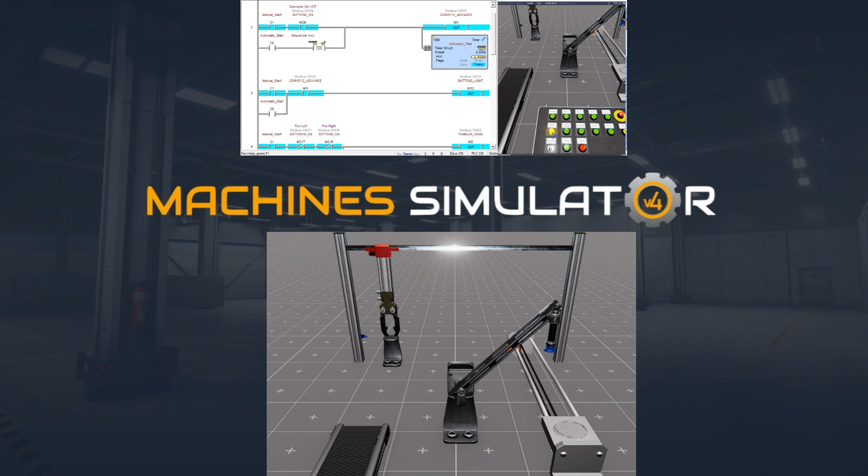The Machine Simulator suite comprises several machines that can be programmed, or you can design your own. One such machine is Benchwork 1, which transfers red pills from the collection area to the exit belt conveyor. Using the Do-More Designer PLC software, we can practice programming by connecting the Do-More Designer PLC simulator to the Machine Simulator Bench 1 machine. Communication will be done using Modbus TCP Ethernet.

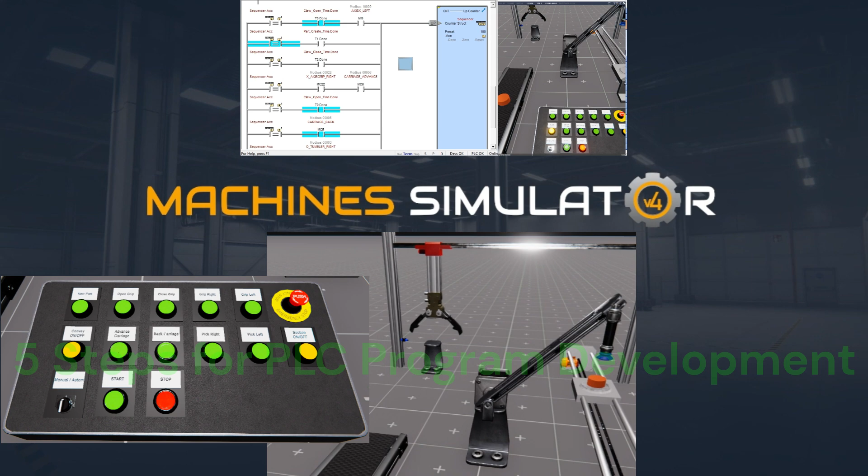The Benchwork 1 machine incorporates a manual and automatic mode to operate. Automatic will incorporate a sequencer using a counter in the PLC program. This is the easiest way to program sequencers. The 5 steps for developing PLC programs will be used to program this machine.

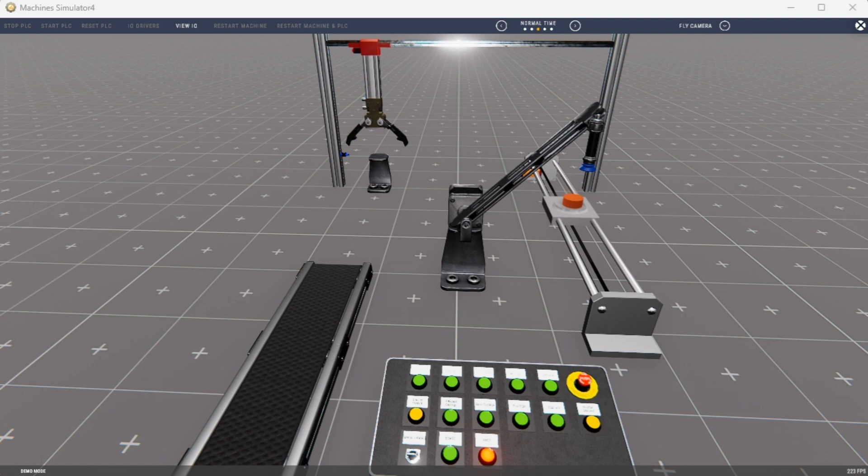While still in demo mode, select View I/O to display the inputs and outputs required for this machine. This PLC programming example will require 15 digital outputs and 23 digital inputs. These PLC I/O are for the machine's physical running and do not include additional registers or bits required for programming.

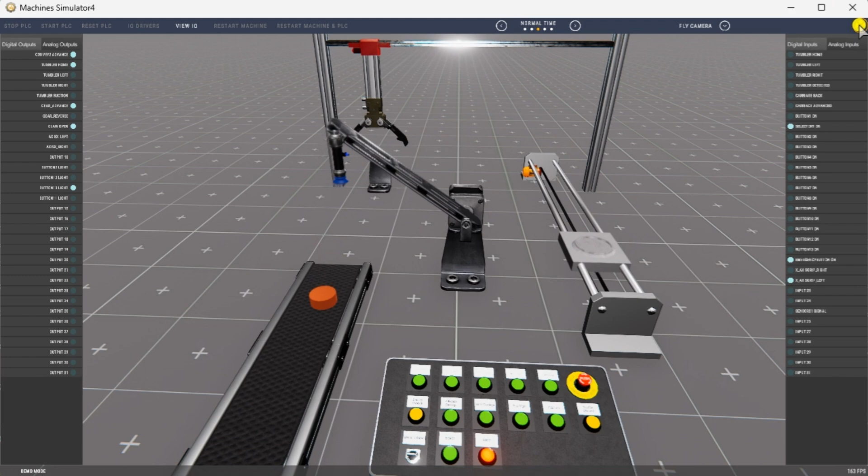In the case of the Benchwork 1 PLC, the inputs include the status of the push buttons on the control console for all the manual operations. These inputs will determine the machine's control. The outputs include signals to move and create the red pills. If you are unsure what an output or input is doing, start the Benchwork 1 machine in demo mode. Select View I/O at the bottom of the Benchwork 1 Machine Simulator window.

You can manually run Benchwork 1 without any control or PLC connection. Select the outputs on the left side to turn on and monitor the inputs on the right side.

Defining the inputs and outputs establishes the communication between the PLC and external devices. This allows the PLC program to monitor the inputs and continuously decide based on their status. The program can then activate the appropriate outputs to control the Benchwork 1 operation.

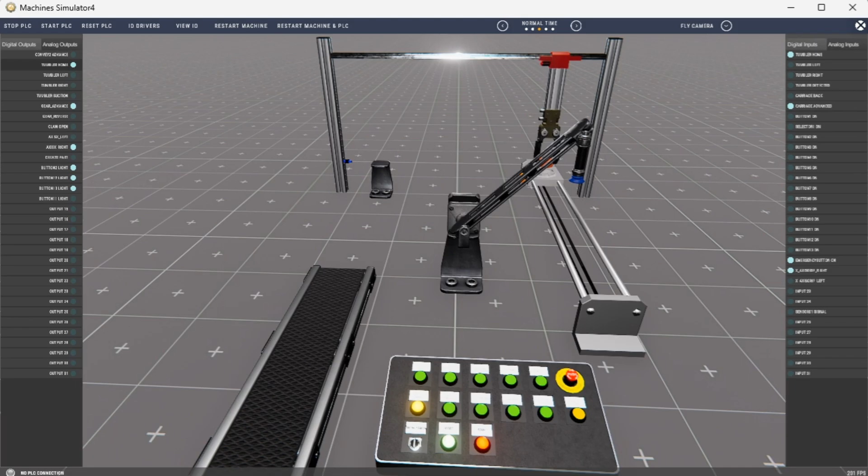Step 3. Develop the logical sequence of operation. Developing a logical sequence of operation is critical in programming any PLC. To ensure a smooth and efficient program, it is important to create a flowchart, sequence table, or detailed information that thoroughly outlines the process that needs to be controlled.

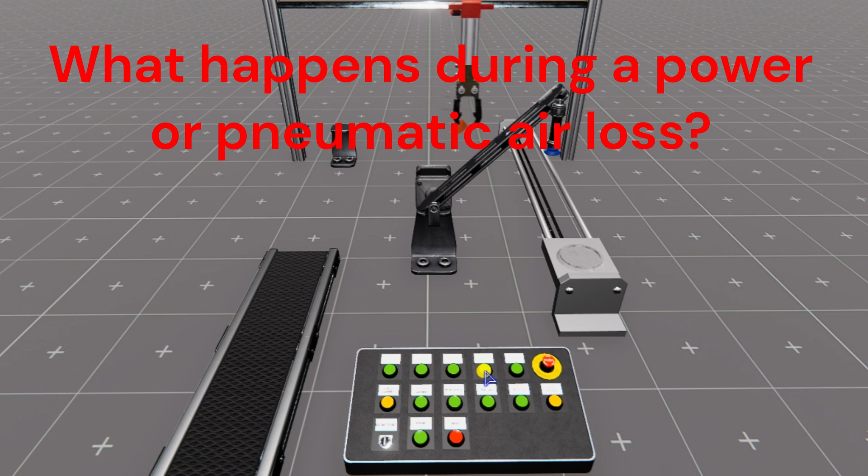This will help answer questions about what happens during a power or pneumatic air loss, or if any outputs or devices fail. Also, it is essential to determine if redundancy is necessary. By understanding all aspects of the operation up front, you can save yourself a lot of time and work and prevent the need to rewrite the PLC program logic continuously.

As a PLC programmer, it is vital to have a comprehensive understanding of the sequence and operation of the machine before starting the programming process. This can be achieved by asking questions or reviewing existing documentation to ensure a clear understanding of the logical steps involved.

Our system has two operating modes, manual and automatic. In manual mode, the Benchwork 1 machine can be controlled manually through the push button console. If a push button for the pick, left, and right are held, the tumbler stays in that position. If the button is released, the tumbler returns to the home position. Since we can only manually turn on one item at a time, if the suction is on and the tumbler is in the left position, it will turn off the suction.

In automatic mode, select the switch, and the start button flashes, indicating how to start the machine. Once this start button is pressed, the stop button lights up, indicating how to stop the operation. When the machine initially goes into automatic mode, the control sequencer resets. Here is a sequence of steps for the automatic mode of the Benchwork 1 machine.

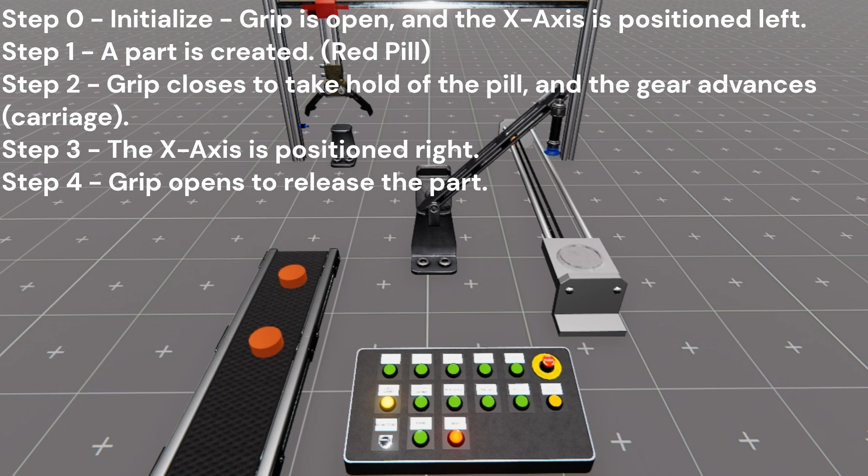Step 0, initialization. Grip is open and the X-axis is positioned left. Step 1, a part is created for the red pill. Step 2, grip closes to take hold of the pill and the gear advances the carriage. Step 3, the X-axis is positioned right. Step 4, grip opens and releases the part. Step 5, the gear reverses the carriage.

Step 6, suction turns on and the tumbler moves right, picking up the pill. Step 7, tumbler moves left. Step 8, the suction turns off and the tumbler returns to the home position. Step 9, the conveyor turns on for 2 seconds, advancing the red pill. The sequence will then reset after the time delay.

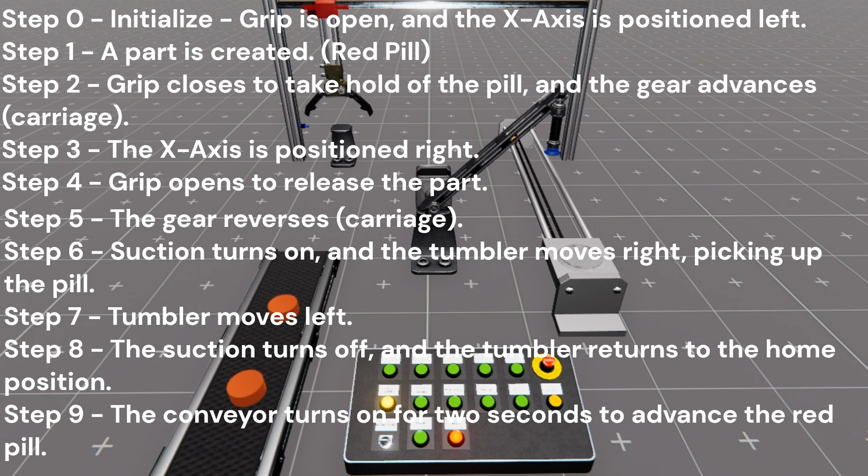By developing a logical sequence of operation, you can create a PLC program that effectively controls the Benchwork 1 PLC and ensures its smooth and reliable functionality. This step sets the foundation for the subsequent development of the Do-More PLC program, which will be covered in the next section.

Step 4. Develop the Do-More PLC program. Developing the Do-More PLC program is the next step in learning how to program the Benchwork 1 machine. This step involves translating the logical sequence of operation developed in the previous section into the program the PLC can execute. It is important to understand the programming language used by the PLC.

The Do-More PLC uses ladder logic, a graphical programming language representing the control logic in a series of rungs. Each rung comprises inputs, outputs, and logical functions that determine the system's behavior. You can start building the ladder logic program by using this logical sequence of operation as a guide. Start the free Do-More Designer software. We have already started programming the machine by selecting the new icon on the main page to start a new project.

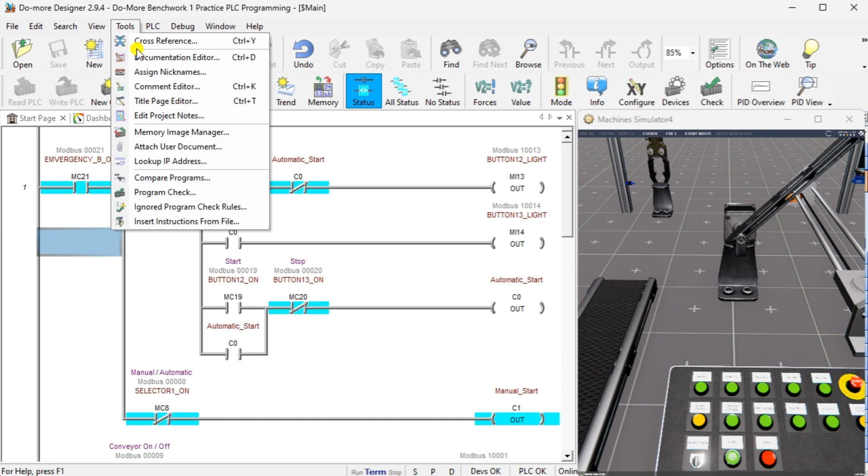Using the documentation editor from the main menu tools, we map the Benchwork 1 machine's inputs and outputs to the corresponding PLC addresses. The first rung of the program will handle the operating modes of the Benchwork 1 machine. Everything is allowed to operate when the emergency button is on.

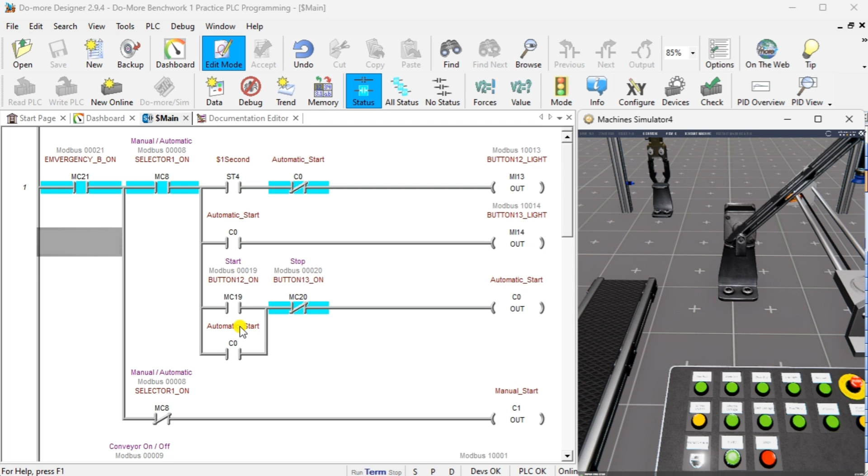The start button will flash if the manual automatic input is on and the automatic start C0 is not on. The stop button light will be on if the automatic start is on. Selecting the start button and not selecting the stop button will start the automatic start bit. This is used to seal the start button. The manual start bit is set C1 if the selector is not on.

The next few rungs list all the outputs. Conditions for manual and automatic operation are shown. The first output is conveyor advance. It will be on if the manual button is selected and the mode is manual, C1. When in automatic and the sequencer count equals 9, the output and timer will be on for 2 seconds. The conveyor light on the panel will operate when the conveyor advance output is on, manual or automatic.

In manual mode, the tumblers on the left and right are activated with manual buttons. If the buttons are not pressed, the tumbler home will be activated. Automatic mode moves the tumbler right at counter sequence 6 and left at counter sequence 7. When the sequencer reaches the value of 8, the tumbler returns home.

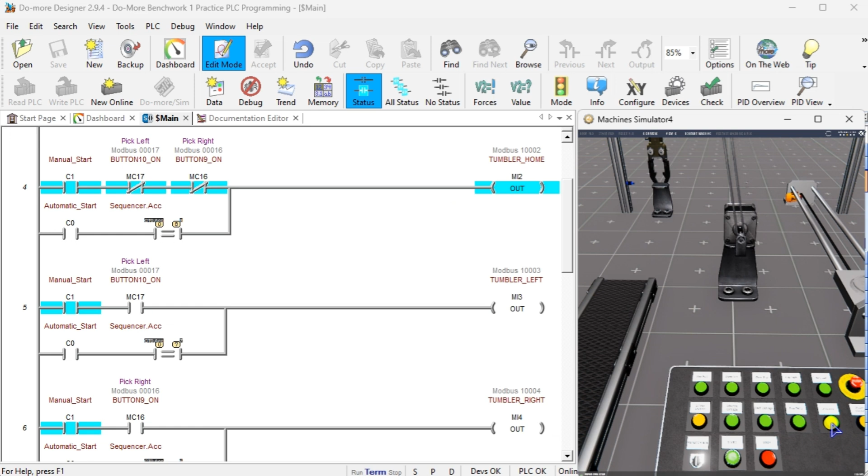The tumbler suction will pick up the red pill in manual mode. The push button will turn on the suction. The suction automatically turns off if the tumbler is moved to the left above the conveyor. This will allow the red pill to drop onto the conveyor belt since you can only press one button. In automatic mode, the tumbler suction will be on steps 6 and 7. The push button light will activate manually and automatically if the tumbler suction is on.

Gear advance and retract will carry the red pill from the x-axis to the tumbler. It is in the x-axis when advanced and the tumbler when reversed. The claw is attached to the x-axis and helps transfer the red pill from the axis to the gear. Manual buttons on the control panel include a claw open and claw close button. In the manual mode, a start-stop circuit controls the claw. Since the claw has no sensor, timers determine whether it fully opens or closes when in automatic mode.

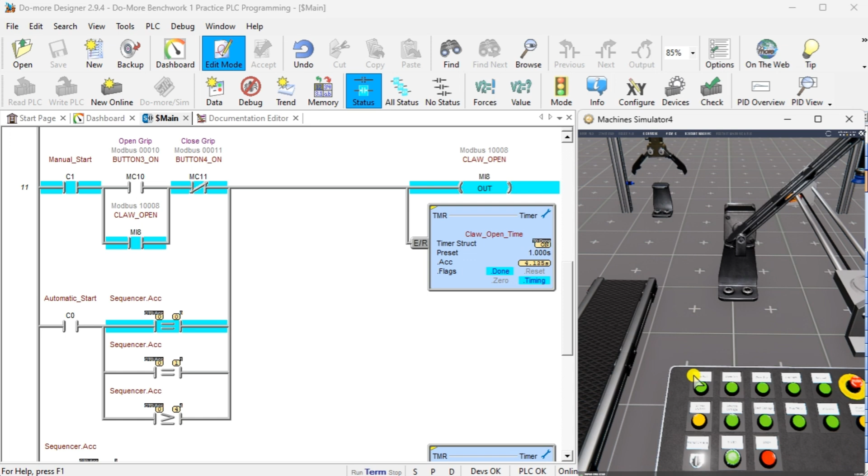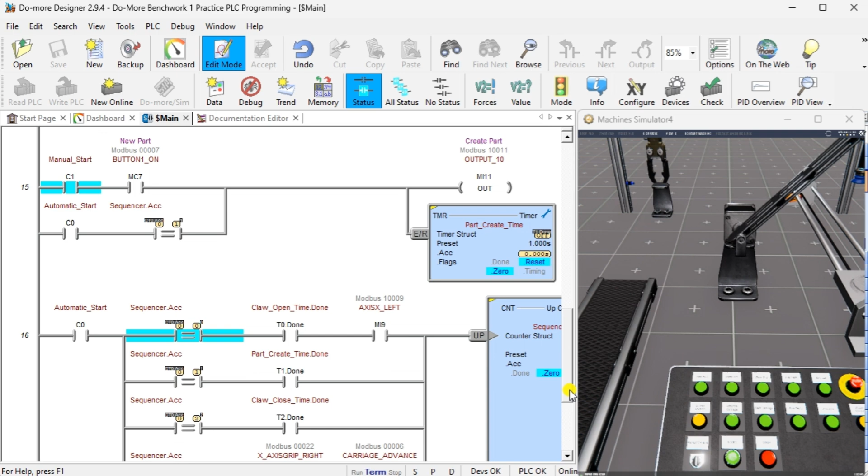Rungs 13 and 14 control the x-axis left and right. Like all the program's other rungs, they can be controlled manually or automatically. The red pill creator also includes a timer to ensure the part has been created. Once our logic accounts for all the outputs, we can use a counter to control the sequencer. The counter up input will use the counter accumulator as the reference for the next step.

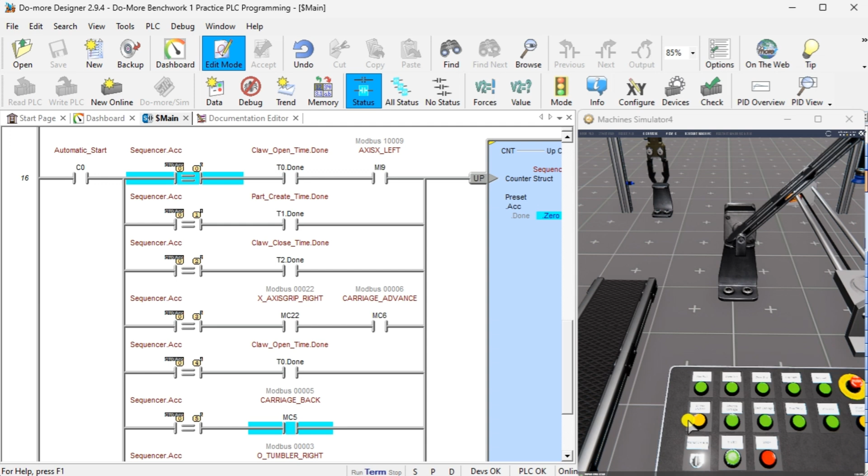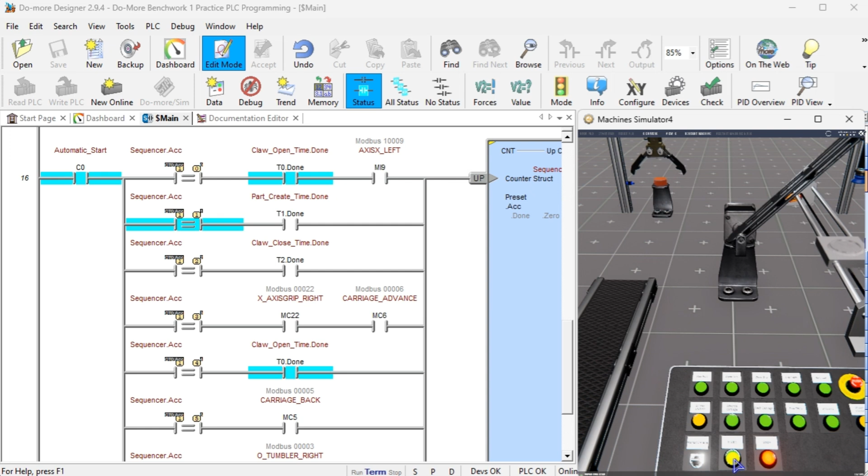Conditions for advancing to the next step are put in series. Step 0 looks for the claw open timer and the x-axis left sensor to be done before advancing to step 1. Step 1 looks for the part creation timer to be done before advancing to step 2. This continues until you reach the end of the sequence. The counter sequence will then be reset when the selector is first set to automatic or when the conveyor's last step timer is completed. An end statement will indicate that this is where the program ends and to repeat the scan.

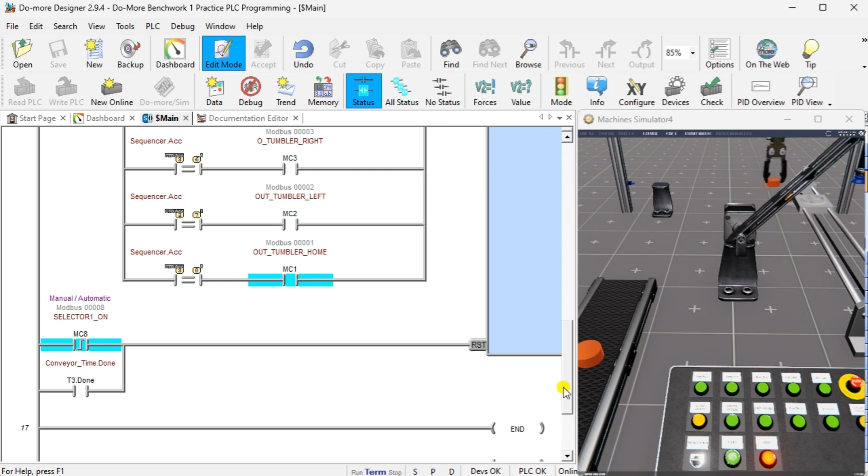Save your program. It is important to always save your program during programming. Select the Do-More Sim icon. This will start the PLC simulator. The Do-More Designer simulator will run independent of the Do-More Designer programming software. When returning to the Do-More Designer software, you can then see we are connected to the simulator by the icon and the status bar at the bottom of the window.

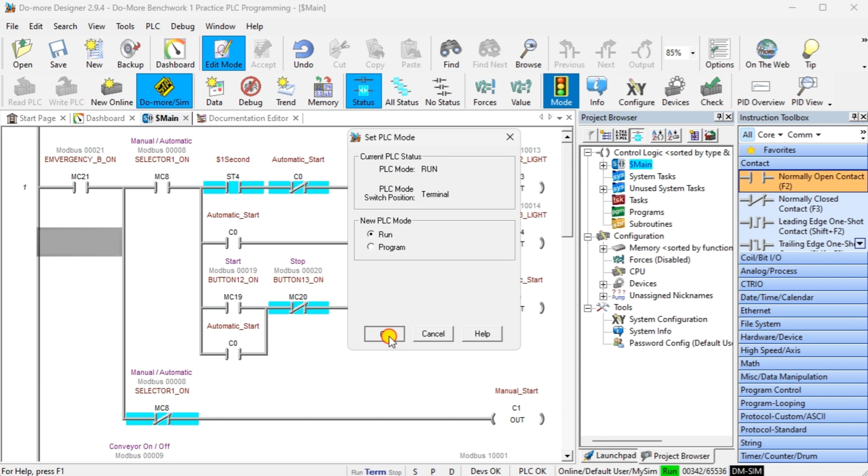Select the write PLC icon. This will transfer our program to the PLC simulator. The mode icon on the main menu will allow you to change the PLC mode from program to run. This also shows the PLC switch position. Select the run mode for the PLC. The Do-More simulator will have a switch position that can also be changed to control the mode of the PLC.

Select System Configuration under the Tools menu of the project browser. This will display the System Configuration window. Under the internal Ethernet port configuration, you will see the IP address of the PLC simulator. Besides this section, there will also be a Modbus TCP/IP, Modbus TCP server configuration. Ensure that this is enabled.

This PLC simulator will act as a Modbus TCP server to the EasyPLC Modbus TCP client. A Modbus client will send requests and the Modbus server will respond. Make a note of the IP address. We will need this to set up our Modbus client in the next step.

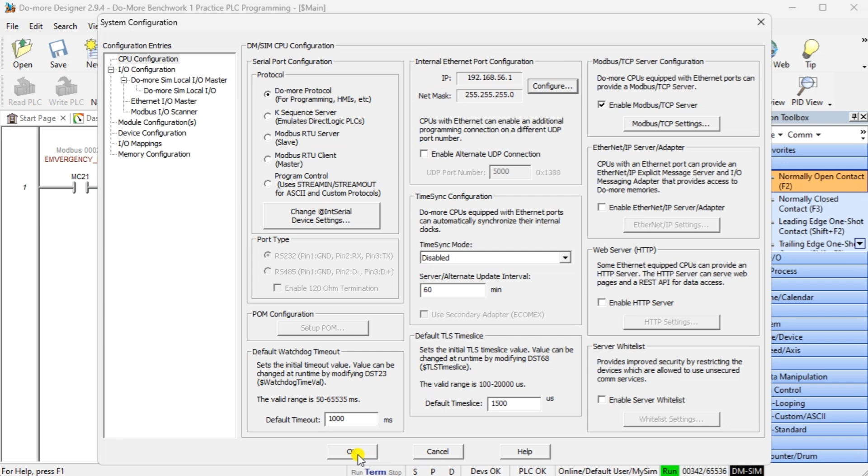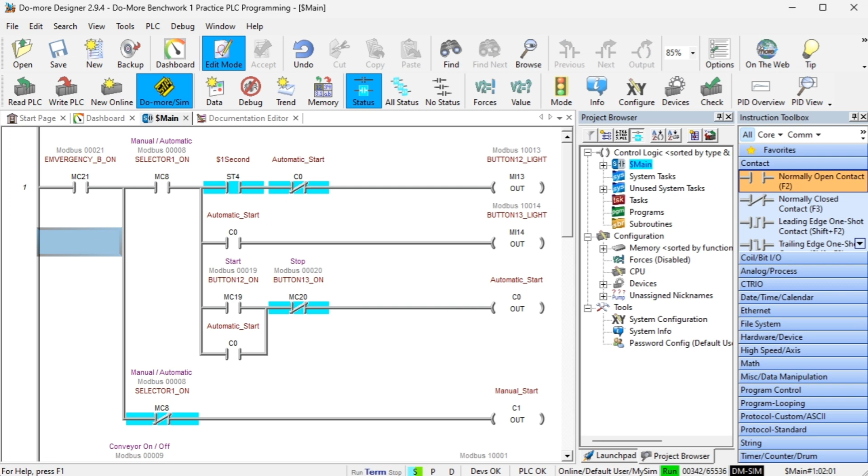By following a systematic approach and referring to a logical sequence of operation, you can develop your robust and efficient Do-More PLC program for the Benchwork 1 machine. This program will serve as the machine's brain, controlling its movements and ensuring its safe and reliable operation.

Step 5. Test the PLC program. To ensure the functionality and accuracy of the Do-More PLC program for the Benchwork 1 machine, it is essential to test the program thoroughly. Utilizing Machine Simulator MS is an efficient way. Using the MS, you can simulate the operation of the Benchwork 1 machine without needing physical hardware, and you minimize the risk of damage during the testing phase.

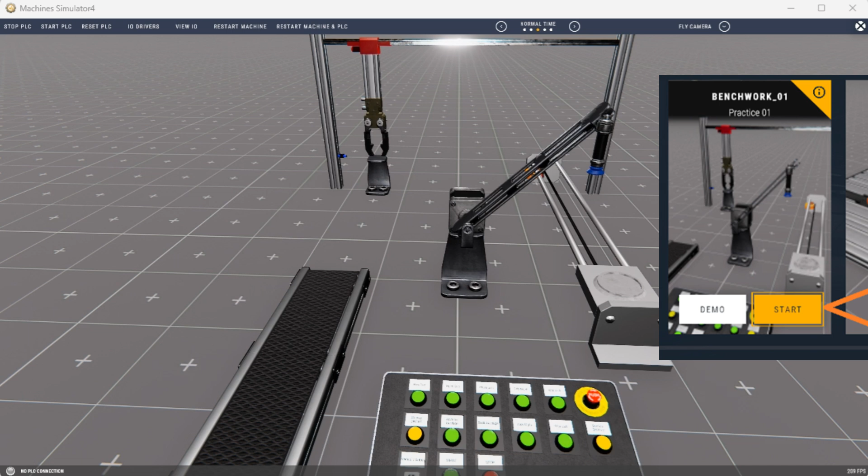We will use Modbus TCP on our Do-More PLC simulator to communicate with the EasyPLC machine simulator. Call up the Benchwork 1 machine simulator in start mode. The current status of the machine simulator will be at the bottom of the screen. Currently we have no PLC connected. Select I/O drivers on the top of the screen. The machine simulator I/O will be displayed.

Ensure we select more I/O than the number required for our Benchwork 1 machine. The EasyPLC driver is selected by default. Under the driver pull-down menu, select Modbus driver. This driver will communicate Modbus TCP or Ethernet and Modbus RTU serial. Select the Configure button. We can now enter the information for our Modbus driver. Select TCP/IP. This means the Ethernet port on your computer will communicate to the Do-More PLC simulator.

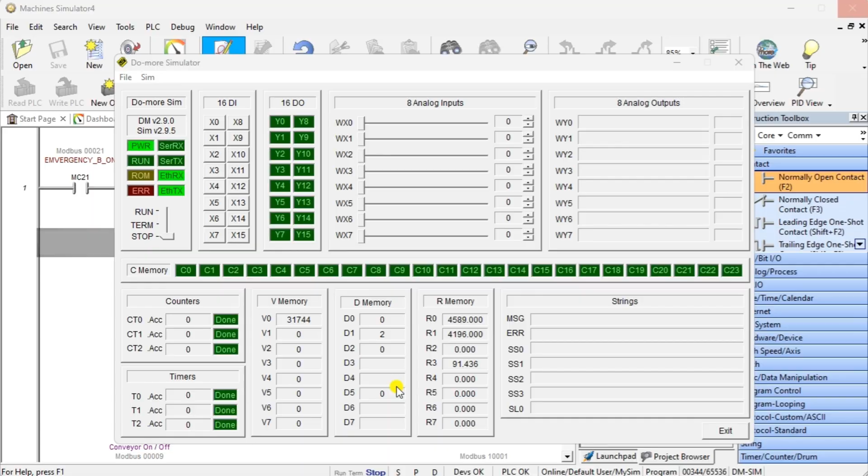The digital inputs from MS to the Do-More PLC will be MI1 to MI15. This will start at address 0 due to the offset of 1. Digital outputs from the MS to the Do-More PLC will be MC1 to MC23. This will begin also at address 0 due to the offset of 1. Select the OK button. You will now see the inputs and outputs specified for the Modbus driver. We can now manually assign the driver outputs to the PLC inputs and the driver inputs to the PLC outputs. However, the automatic assignment works well and will save you time.

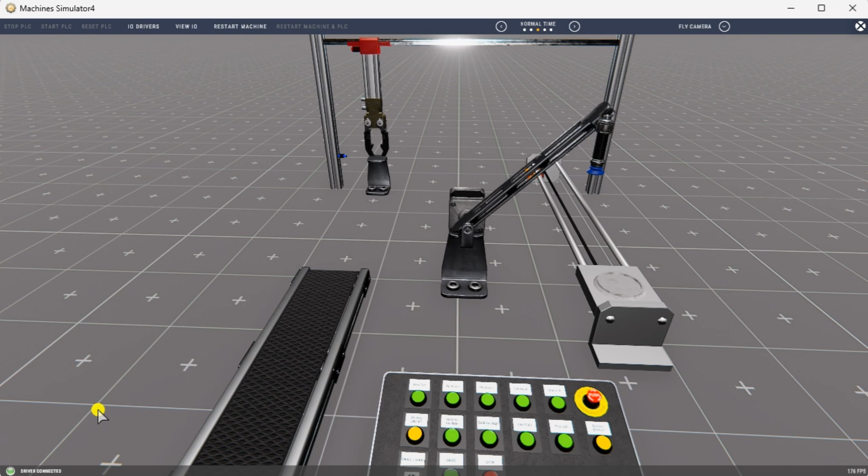Select Automatic Assignment from the driver option in the main menu. This will automatically assign the PLC simulator I/O to the machine simulator I/O. Select Start Driver and exit the main menu. On the bottom left side of the window, the driver communicates with the Do-More PLC simulator with a green light. Select View I/O to see the machine simulator's input and output status.

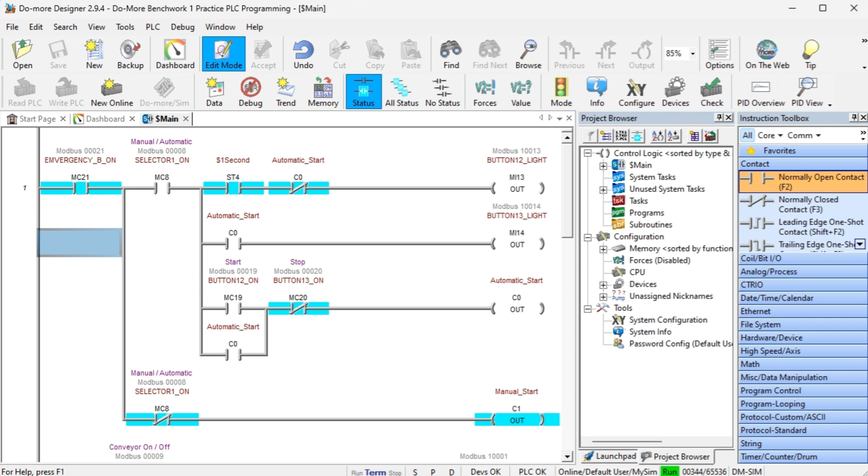Ensure that Do-More PLC is in run mode. We can see the operation of our Benchwork 1 machine. The inputs and outputs of the MS will respond to the PLC controller. Using the Data View window of the Do-More Designer programming software, we can also watch the inputs and outputs operation. We can now manually move the red pill or do this automatically.

Using Machine Simulator or MS to test the program will ensure that our program works. Troubleshooting is quickly done without damage to any physical hardware. This testing phase is critical in ensuring the safe and reliable operation of our Benchwork 1 machine.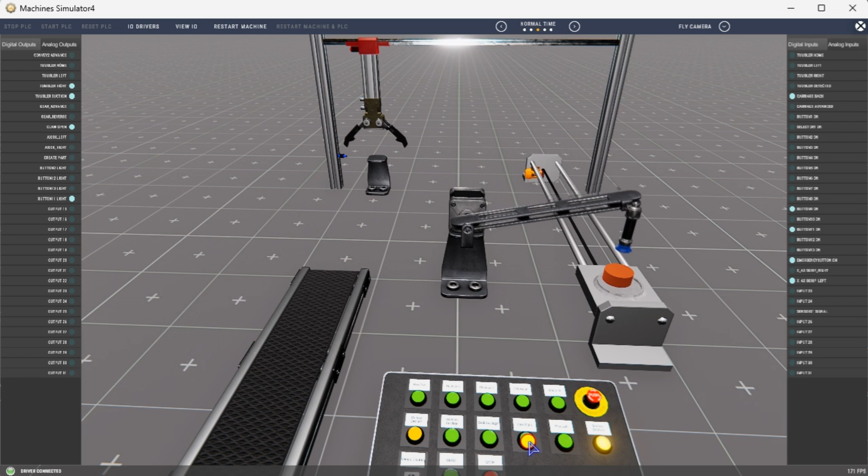You can practice your modification and debug by modifying the Benchwork 1 machine operation in the following way. Change the automatic sequence to transfer 5 red pills and then stop. After stopping, the conveyor should also run until all the pills are off of it. Calculate the rate of red pills transferred for this machine in number per hour.